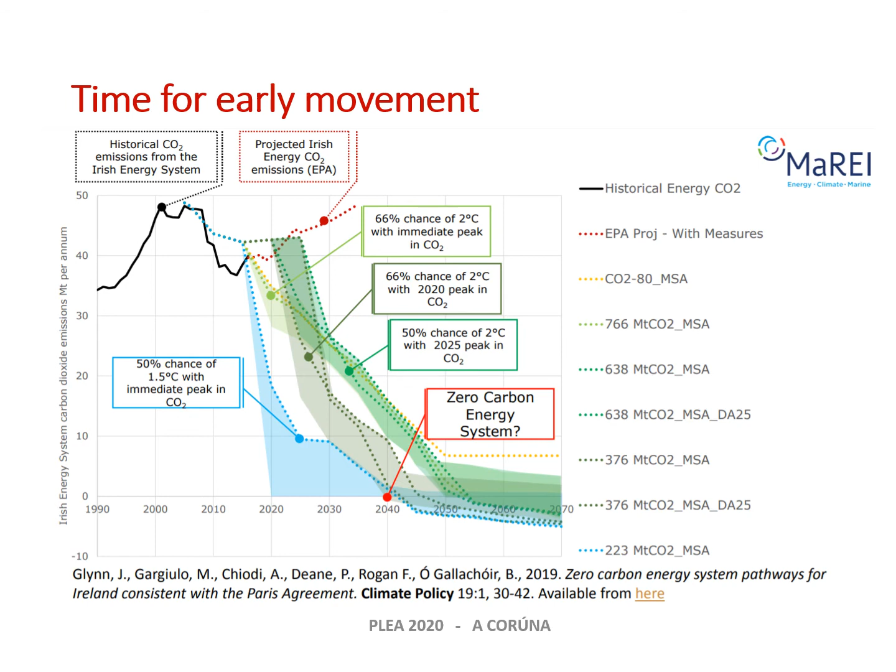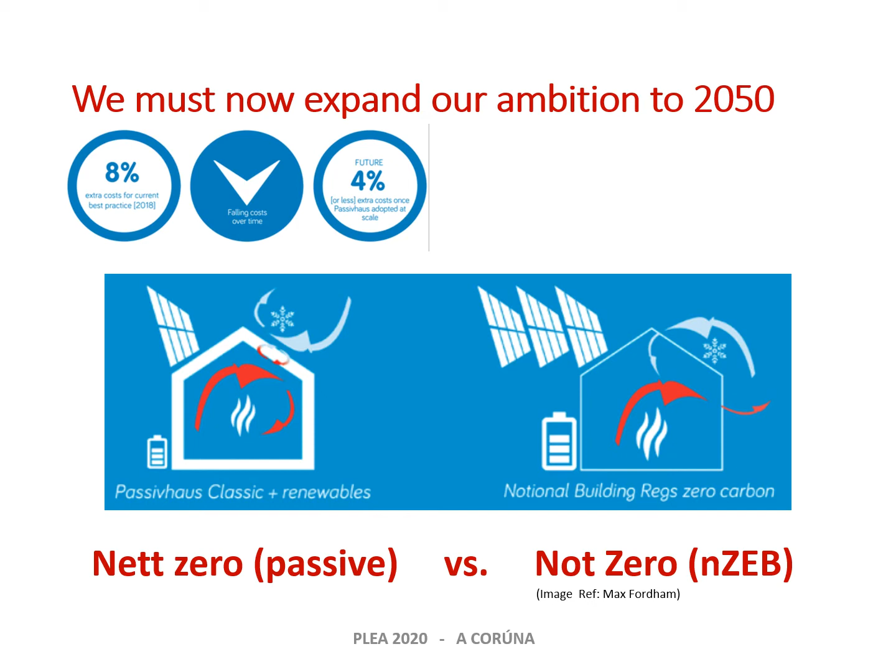And we also are aware of the fact that we need early movement. So the earlier the movement, the greater the ambition will give us space in order to work out how to solve the problems. The longer we leave this, the more space we are going to run out of. In regards to ambition, it is clear that net zero, which I would refer to as passive, versus not zero, which is the current NZEB legislation, needs to be significantly reviewed. And it's interesting that at the European Energy Conference in June last, ambition was one of the key issues identified by people attending the conference as to where our energy initiatives need to go in Europe.

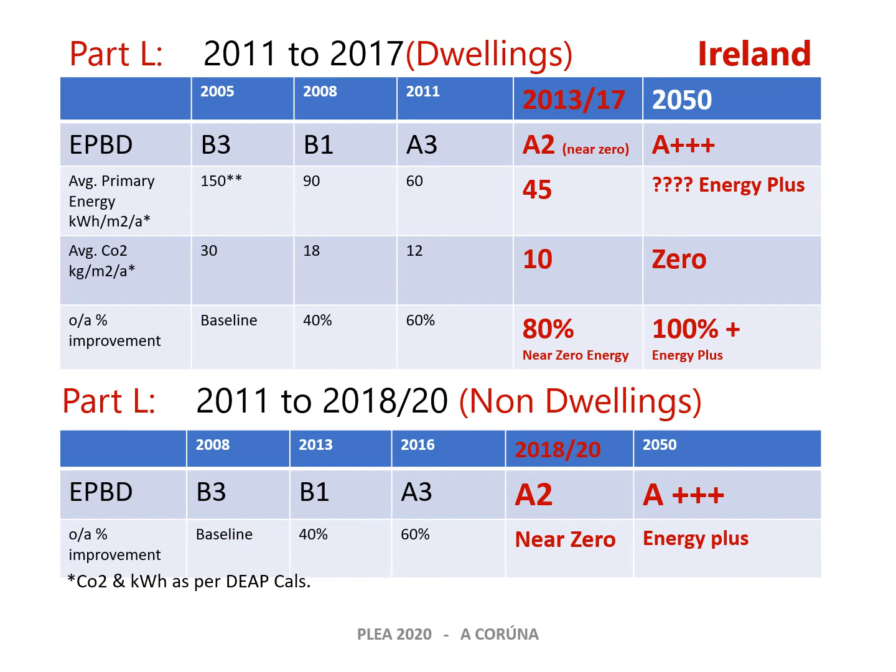I'm speaking mainly from an Irish perspective, that's the Republic of Ireland, but equally, most of what I say applies to most of the Northern European countries, certainly in terms of the use of passive design. In Ireland, we have new legislation, which is basically NZEB legislation, which is current, and for non-dwellings will be operable from the 1st of January of next year. So this is all very much relevant right now. And my concern is that the reach of this legislation is not ambitious enough, whereas if we are building buildings now, they need to be completed and in use in 2050 as 0+ buildings. And it would seem that the buildings being built now new will not achieve that. So there is a problem.

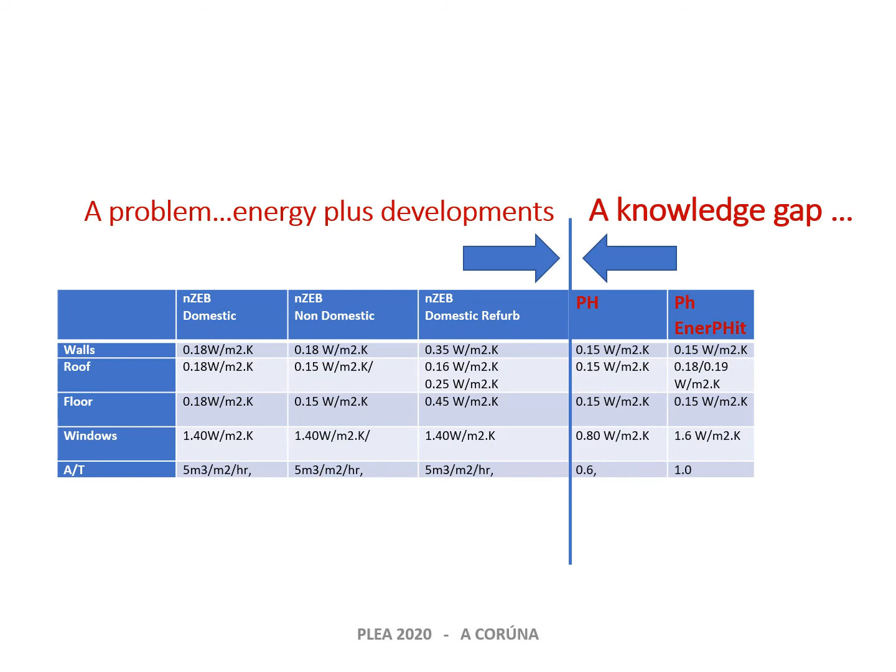We do need to develop energy plus developments, and yet the standards being set under NZEB domestic, non-domestic and refurb are just not high enough in terms of U values or standards to what we can achieve, for example, using passive house and passive house EnerPHit. And the EnerPHit is important because we have an issue that the key challenge is refurbishment. We need to really look at how we are going to refurb, and to do that we need to move beyond the cost optimality of NZEB to the science and specific energy requirements of passive house.

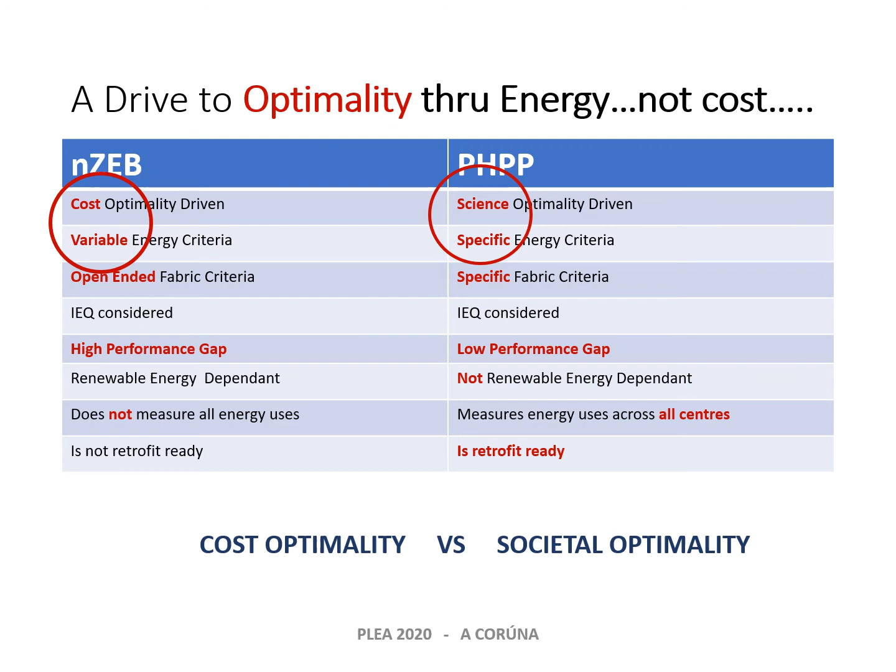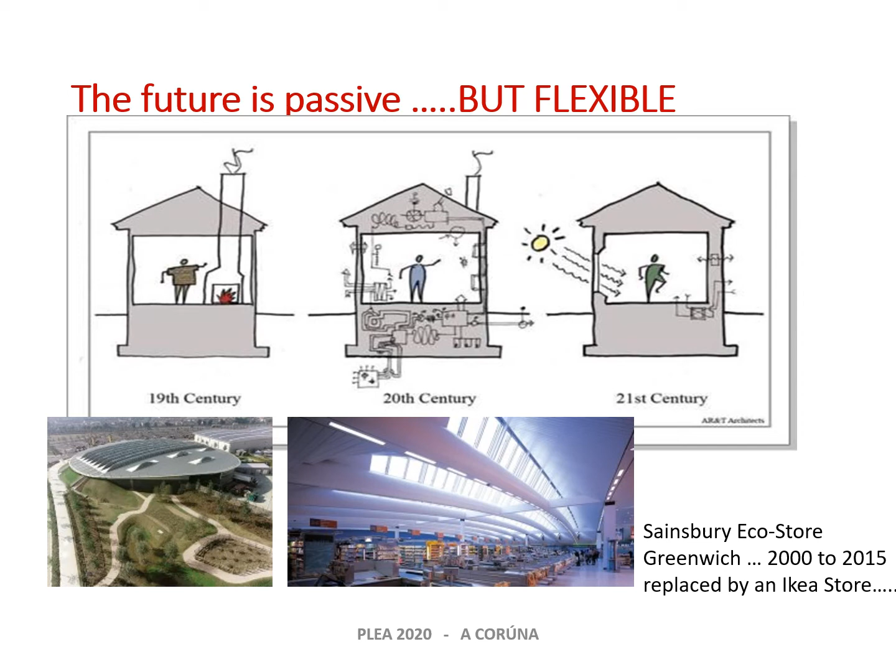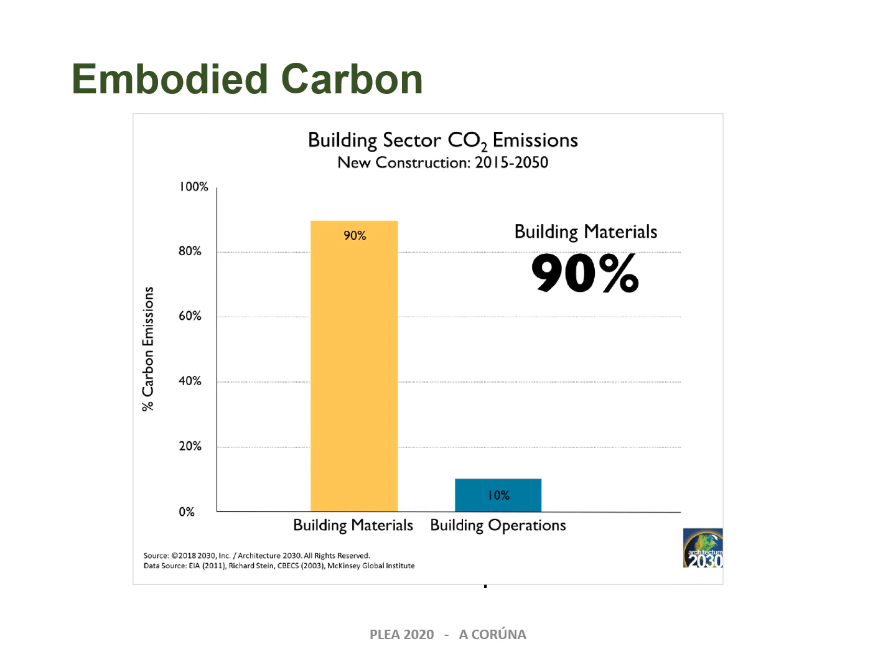There is no doubt in my mind that passive house is the future, but it does need to be flexible. And I reference in my paper the Sainsbury Eco Store in Greenwich, for example, built to a very high eco standard back in 2000, but demolished in 2015. But we cannot be demolishing buildings of this nature, because the key issue is that in renovation, we need to keep the buildings, because the embodied carbon in a lot of the larger buildings is so significant. And as energy standards in operation fall, then the proportional mix of the embodied carbon becomes quite significant. And this is something we are not considering under current standards.

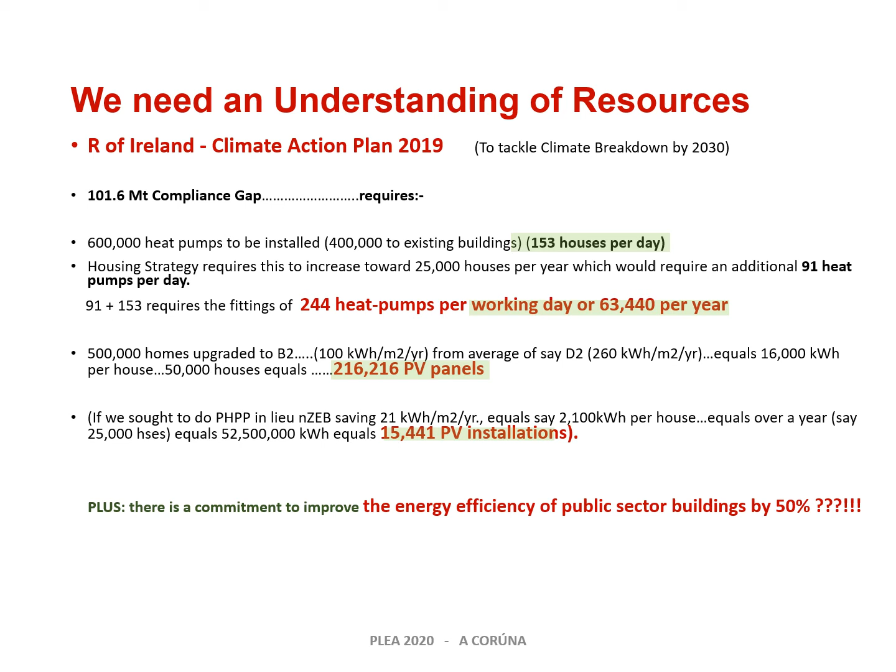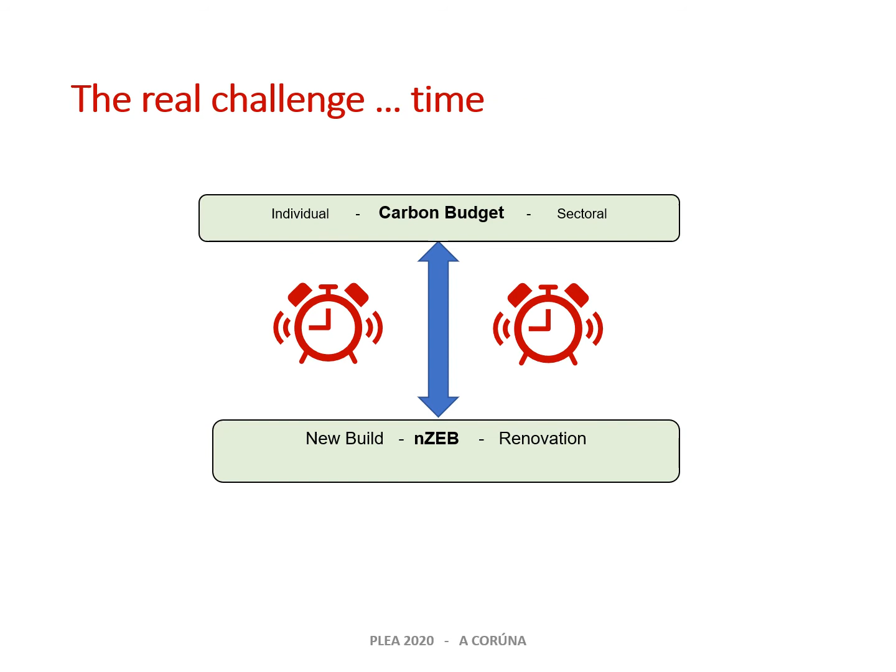So, for example, we need an understanding of resources. In Ireland, we haven't done so, and the Climate Action Plan has actually been brought to court by citizens and has been found to be wanting in that regard. So the real problem, in fact, is resources, the carbon budget, and how NZEB is going to deal with that. And the real challenge is time. Do we have time to solve these problems? And to do so, we need to reconsider NZEB.

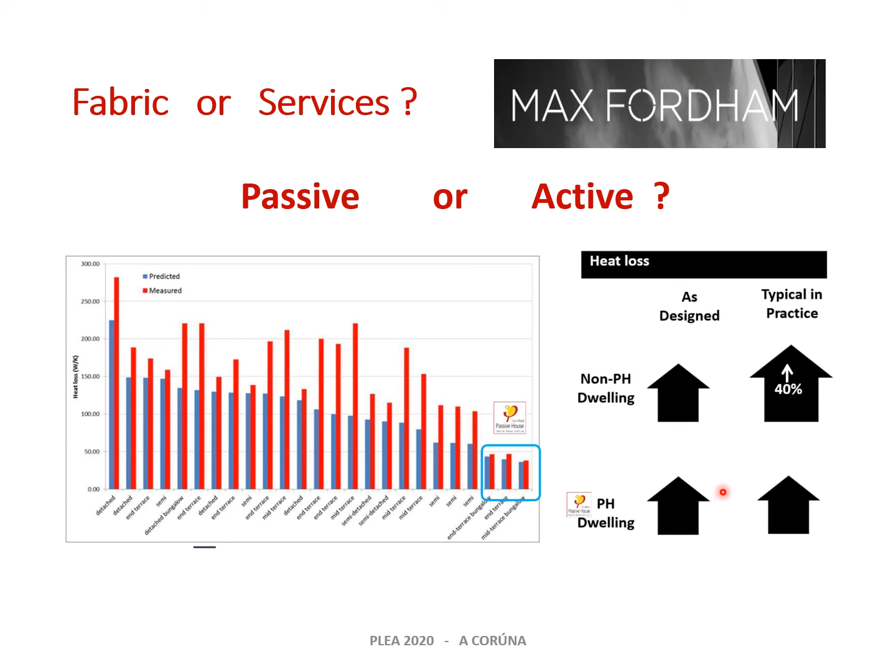So do we go with passive or active? It seems to me that passive will give a much better quality of predictability in terms of heat loss as designed. The other beautiful thing about passive is that we can control it as designers. So when we have good heating systems, air tightness and good fabric, then we don't have to worry about the things that we don't control, which are the indoor temperatures, the hours of heating and so on.

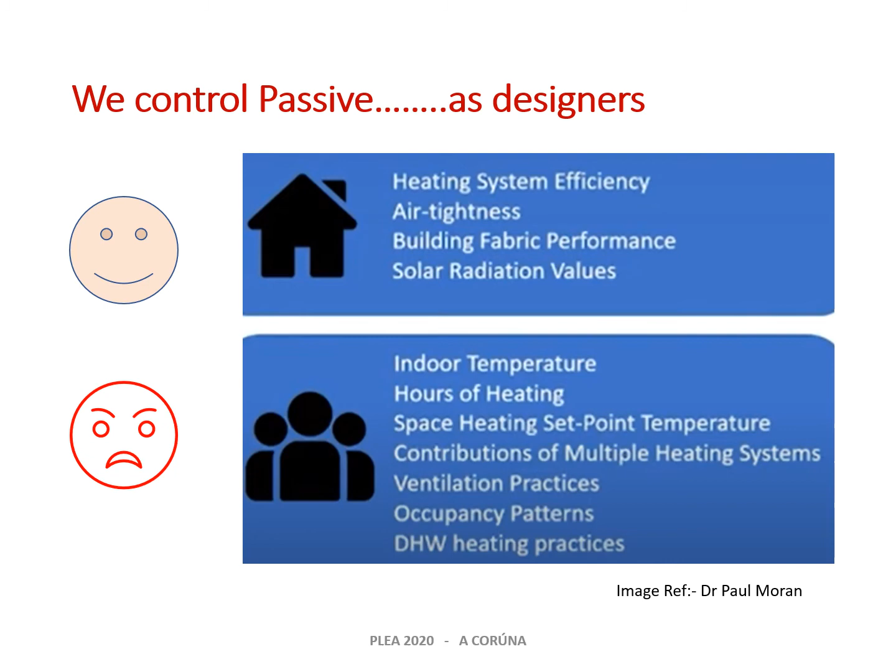So where do we go from here? What do we do in terms of ensuring that we have accuracy and resilience? Certainly one of the things we need to move on to is an attitude of building control gone to a form of governance of building. And this is something that the Green Building Council are obviously promoting in terms of their European passport for buildings. So that when we bring a building into use, it comes with a passport in terms of its overall energy use.

From that, I think we will begin to achieve accuracy, and we will also begin to identify the fact that our towns are a national asset, a resources centre, so that we can't ignore the inbuilt resources that are existent within our existing towns. And this is a European-wide phenomenon, whereby the small towns are suffering from planning strategies that have empowered retail facilities that are in effect non-resilient, particularly in regards to energy and community, and that was clearly shown in the COVID.